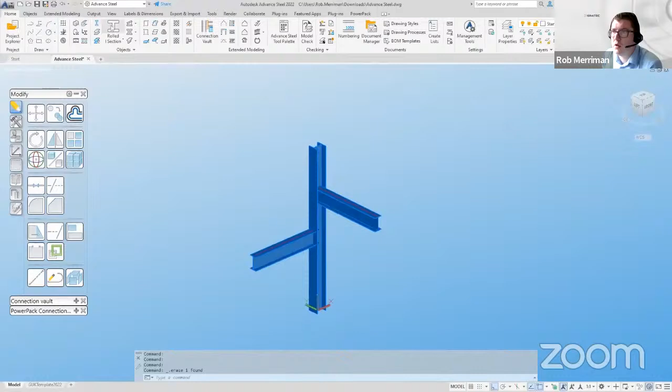What we have here is, because Advance Steel is a 3D platform, if I want to model a 3D beam, I literally click the beam command, choose my start point, choose my end point, like you would draw a line in AutoCAD at the moment. We then can choose from basically any standard section from around the world - they're all preloaded into Advance Steel, you don't need to load anything.

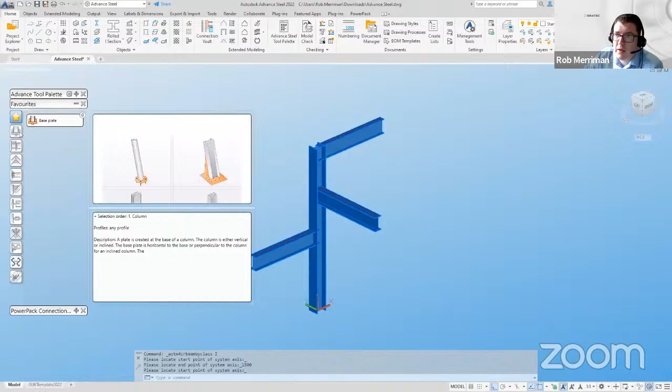And here we have our connection vault, so this is where we've got our 200 connections. You simply choose the connection, choose the member that you want to apply it to, and then within a few seconds the system will create the base plate, the anchors to go into the concrete, and it actually welds it all together for me as well.

Everything to do with Advance Steel, we work through this dialog box in here. So if I want to change the anchors, the spacings of the anchors, we can literally work through this. We can change the weld information - do we need extra stiffeners? That sort of thing.

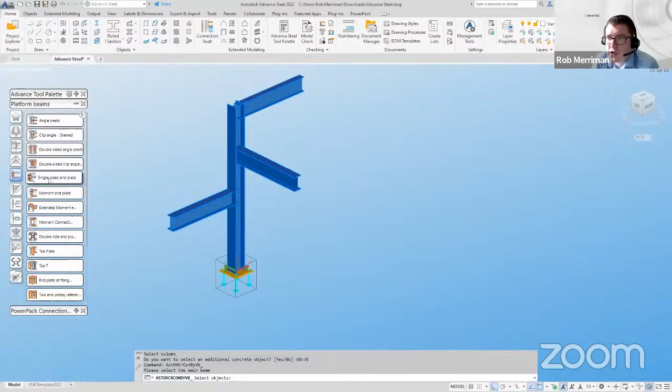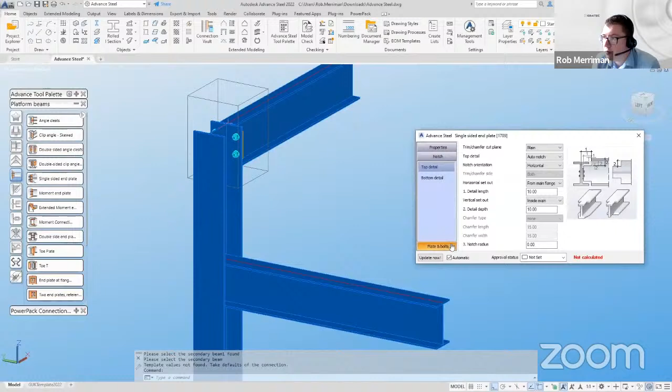So if we look at some actual beam to beam connections here, we're going to put a single-sided end plate on, choose one beam, choose the beam that's connected into it, and again the system will take care of everything for you. That is putting the bolts in, putting the holes in the beam, putting the holes in the plate, welding everything together - it's taking care of basically everything for you. It's just a case of working through the dialogue to match what your connection engineer requires.

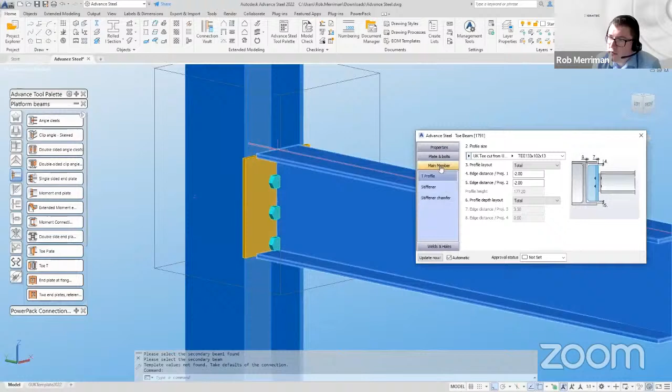Just as a real high level overview to begin with, we're just going to put a few different connections on these bits in here. So what we're putting on here is a toe plate connection. You can see the bolts aren't exactly positioned correctly, so what we do is we just increase the center distance to something a bit more reasonable, like 70 millimeters. And then we can change how the bolts are set out vertically.

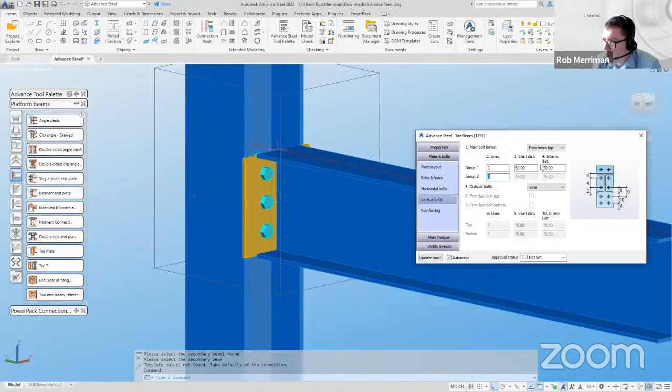And then finally, another standard or industry standard connection would be a fin plate connection. So again, what we can do in here is we can go through, change our bolt centers, and then put the fin plate in the middle of that beam.

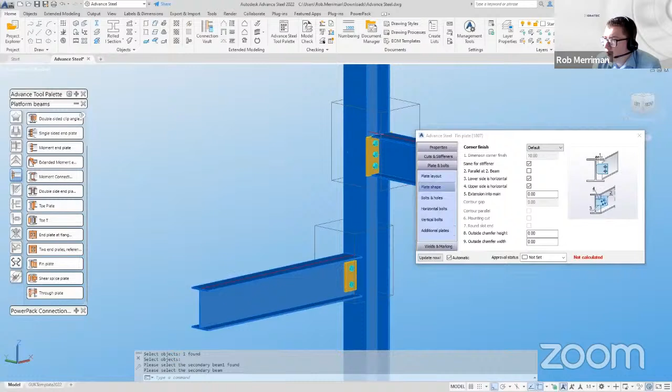Now, what we can do with Advance Steel as well, because we're in a 3D environment, I can clash check the steelwork, so the system will tell me if something is clashing. You can see in there I've got some stiffeners that the joint put on, and those are currently clashing with the bolts, so the system will tell me that.

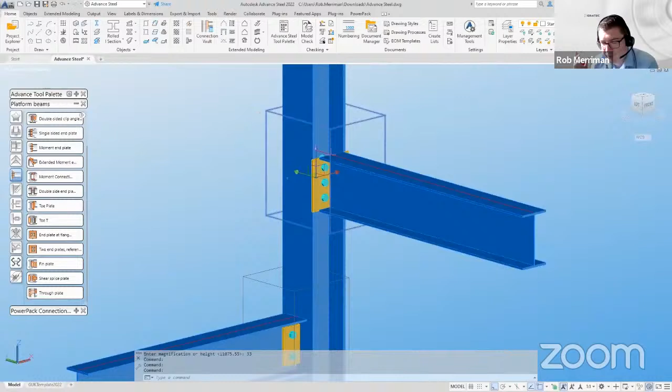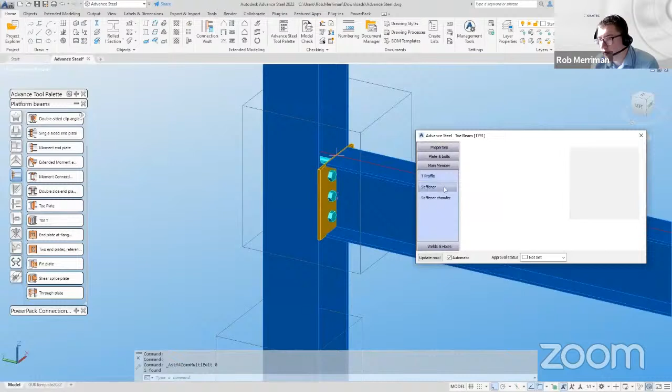And that gives me the benefit of picking up any errors with our steelwork or our structural timber before we get to site, because obviously, as I'm sure those of you who have to deliver steelwork or have steelwork projects on site, if there is a problem, it's quite time consuming and quite expensive to rectify problems on site. At the moment, this is just a 3D model, so it will take seconds for me to correct the error.

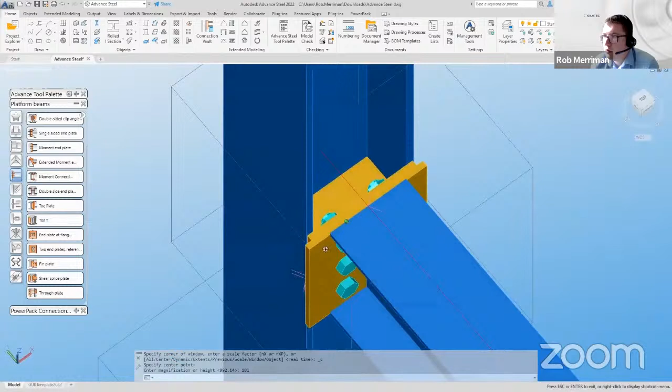Now, what I didn't realize in here is that on the column it's made from a beam cutting, so I had to change it to a plate, and I've still got an issue in there because I didn't turn all the stiffeners off properly. So it's just a case of going back into the dialog and saying, okay, we want to turn the stiffeners off.

And when I clash check it for the final time, that will tell me that there are no errors in that model now.

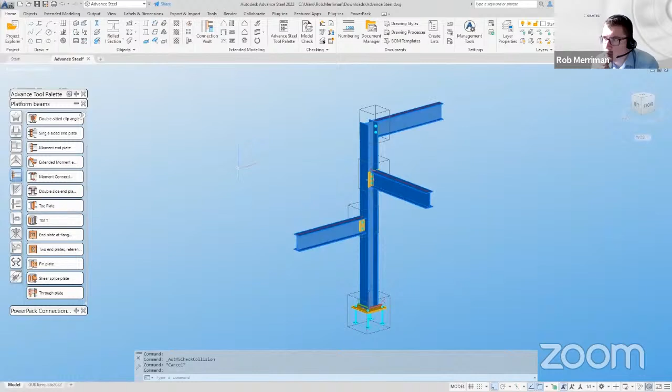Now, I'm showing you advanced steel, but if you have an AEC collection, you're possibly doing this kind of work inside Revit. Revit doesn't have all 200 connections, but we could have modeled that in Revit.

What we can do with advanced steel then is once our modeling is complete, we can actually produce piece part drawings and assembly drawings in minutes for the whole project.

And for the fabrication, we can then generate CNC data for the members and plates automatically with a click of a button. So let's go back in and have a look at what we can do for the output from advanced steel. Then in a minute, we'll move on to some timber specific things.

Once we have run the numbering on our model, the system will determine what's the same and what's different. We then have a palette on the left-hand side where I can choose what I want to run and how I want to run it. So I click the all plates button. The system will find the plates and put those onto drawing sheets for me. And for my assemblies, I've clicked the all assemblies button.

Now, there are 4 assemblies in here. It will take 2 to 3 seconds per drawing. And then we're going to go and have a look at what the system will do when those drawings have run.

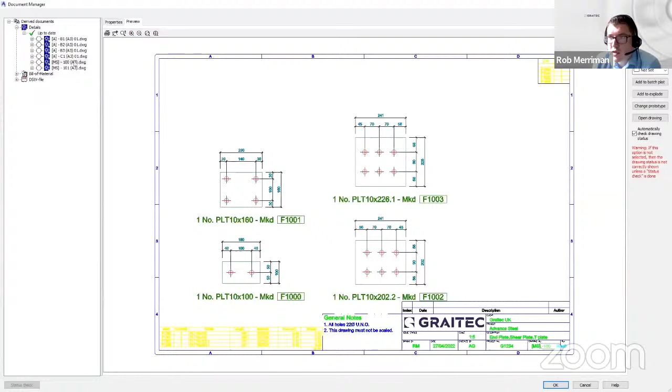So with advanced steel, what we have is what we call a document manager. The system here is telling me these are all the piece part drawings. So if we have a look at the plate drawings, that is what it takes 2 or 3 seconds to produce. It gives you the horizontal and vertical dimensions. So those are our piece part marks.

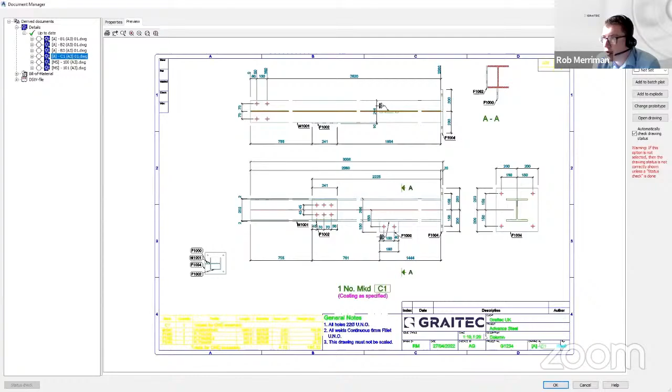And then for our assemblies, the system will show you what's welded together, how it's welded together, what parts you need. So it's round tripping all of the piece part information. You can see that column's got a toe plate, a fin plate. It's giving all the welding information.

Now to run our CNC data, I select the plates in the model. I push the button for a DXF file, and that will create those files for me. The system produces those files so that a plasma machine or a laser machine can actually go and cut out all of those plates ready for the fabricator.

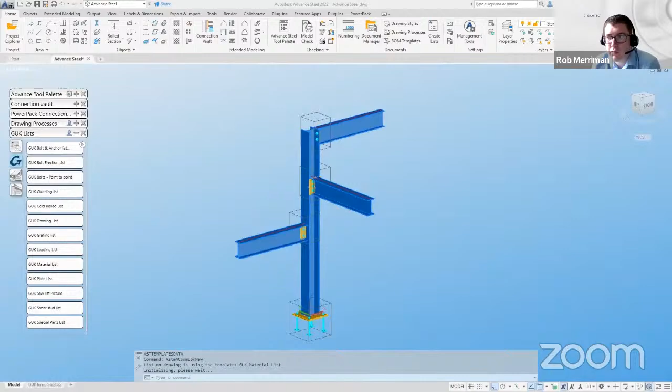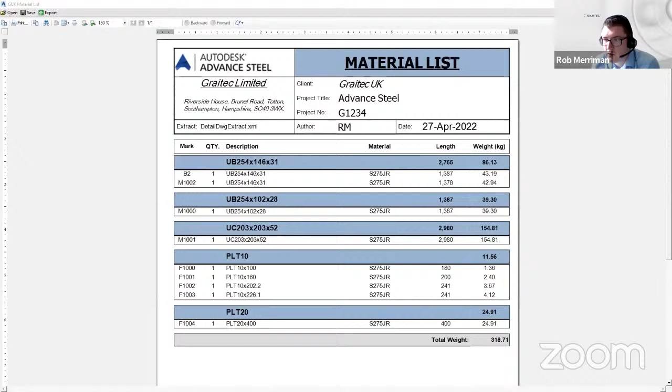And then the fabricator actually needs to order that material. So rather than us measuring things and creating a list in Excel manually, because everything has been 3D modeled, we can extract all of that data into a material list, for example. This will tell me how much 254, 146, 31 I need, what it's broken down into, what plates I need, and that kind of thing.

So that is a very high level overview of advanced steel. I know for Andrew and the Structural Timber Association, we are looking at advanced steel for timber. So why advanced steel for timber?

For me, structural timber models are simply beams and columns. And in advanced steel, it doesn't matter whether that is an I-beam or a structural glulam beam. So that sort of project in there, that's something I've created in advanced steel in the past. That is a mix of steel and timber.

There are already timber sections defined in advanced steel. So we've got timber purlins, we've got stock square timbers, we've got glulam sizes. And with advanced steel, if there isn't something in there, we can actually add it in ourselves.

We do already have a number of the STA members using Advance Steel, and structural timber companies using Advance Steel. So a few examples are Stuart Milne - we've done a training package with all the offices of Stuart Milne. Fordingbridge, they use it for their canopies and things like that. And then we've got companies such as Byram Associates, Harmony Timber, Fleming Homes, Frame Homes, Castle Oak, Sipco, who are predominantly a timber business, but the majority of their projects will have some structural steel work buried in there.

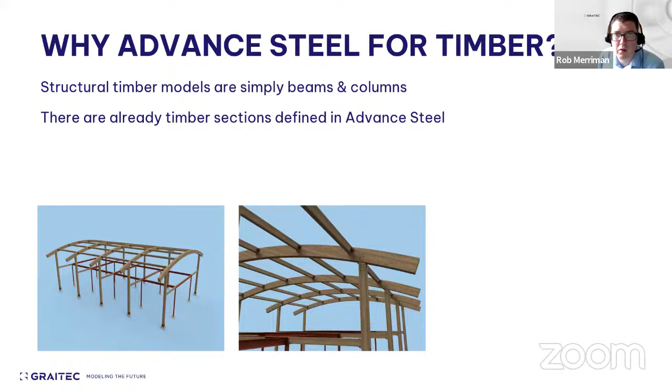So although these companies are 90% timber, there is some steelwork in their projects, and we found that's what is producing their bottlenecks and slowing them down. So these are companies that have already introduced Advance Steel to their workflow.

Structural timber or steel to timber connections are joined with steel plates, bolts, anchors, and welds. For example, here we've got a glulam column with a steel foot on it. You'll need to produce fabrication drawings, CNC data, for the steelwork or the glulam, which is what we just looked at with Advance Steel.

Rob, I've seen a question come up in the Zoom chat: is the system objectified, where you can alter any piece of information and adjust the details or spec and vice versa? Yes. When we put connections on in Advance Steel, we put them between the two members. So if a member has to move 300 millimeters, that connection moves with it, all the plates, bolts, and welds moving automatically.

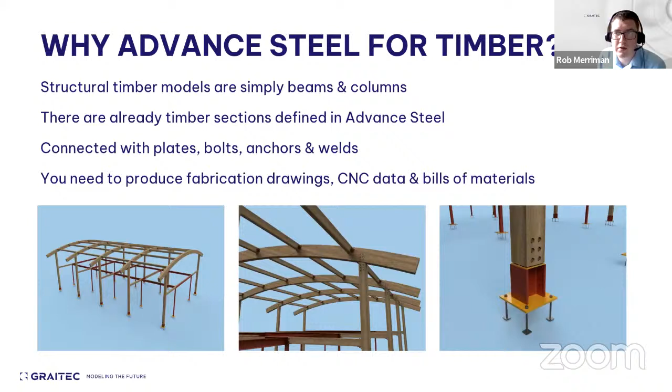If your connection engineer comes back and says the bolts need to change from 3 M16 to 3 M20 and the plate needs to be bigger, we just go into that dialogue like before, change the values, and the system updates itself. If we then make updates to the model, the document manager recognizes the changes and warns us that the drawings are now out of date, allowing us to update them as needed.

Advance Steel is a steel detailing program, so out of those 200 connections, there currently aren't any for timber to timber or timber to steel. But what we can do is create what we call custom connections.

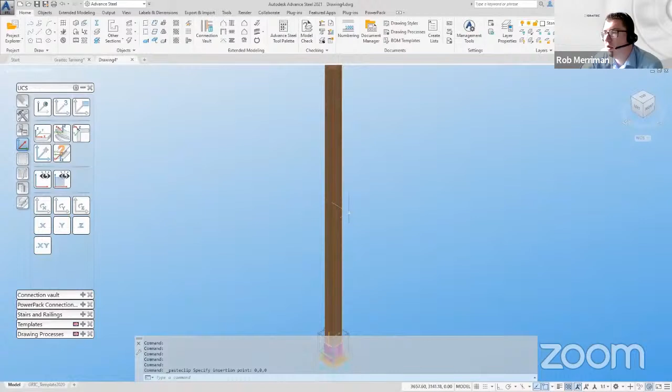I'm not going to show you the building of each individual piece, since we're only here for a set amount of time - I could probably do 3 or 4 hours on this, but it's a Friday. So I've already created the connection we just looked at, just by doing everything we've talked about and modeling some bits manually.

What I'm going to do now is clash check it, then create what we call a custom connection. I'm also going to check what's attached in the workshop, so we can see that fin plate is attached there. There's some setup I need to do here.

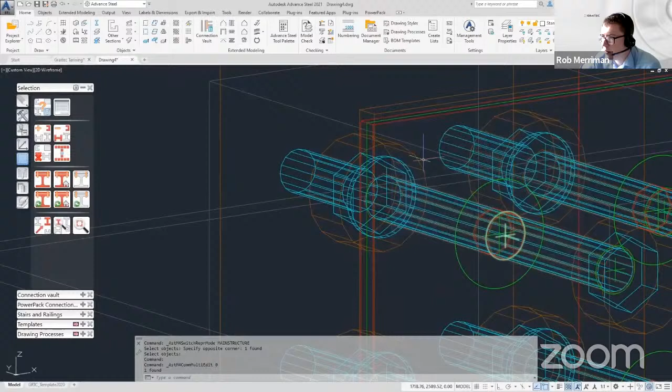That connection doesn't exist in the system, but with Advance Steel we have what we call a custom connection. I can build everything, then say I want to apply this and give it a name. This is a 240 glulam column that I have.

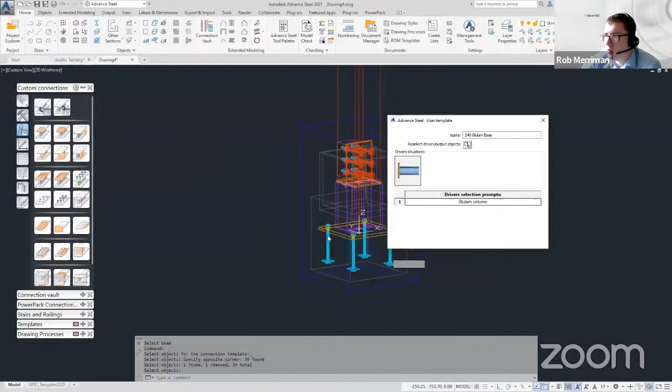We're going to choose my input, which is going to be the glulam column, and then choose what I want the system to apply - all of that information automatically to my glulam column. It's something I don't want to model across multiple projects.

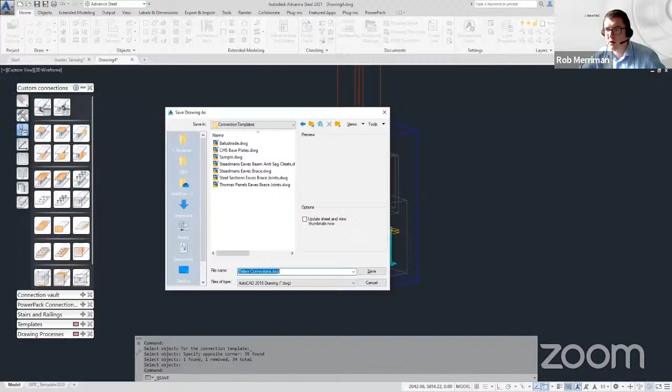Now we do need to save this in a particular folder so the system recognizes it as what we call a custom connection. So the file I'm going to call this DWG file custom connections, and I can close that down.

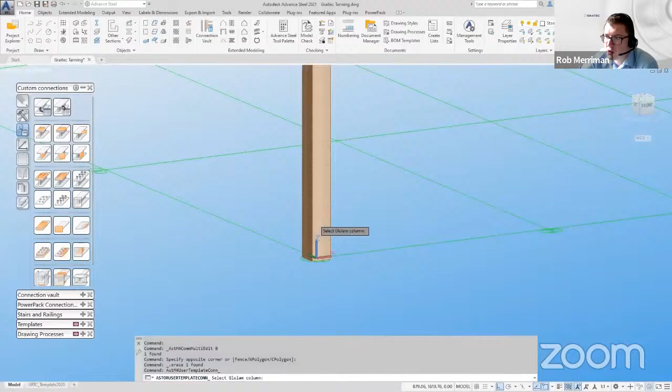Now if I delete that from my file and reset the glulam column so it has no cuts or shortenings, just modeled as a glulam column, I can say I want to insert a custom connection. We can see the folder there, custom connections - choose the glulam connection, click on the column, and hey presto, the system applies all that information automatically.

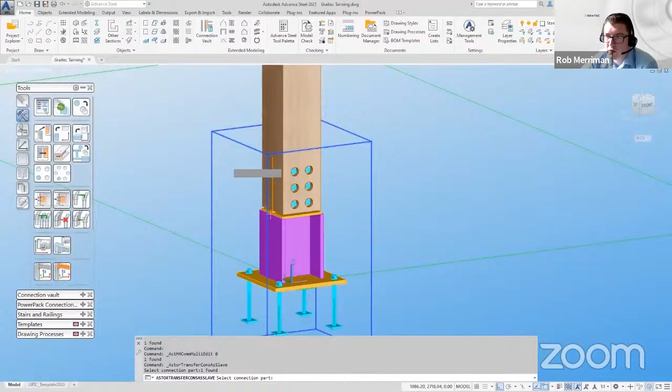So it means I can model it once and then use it across multiple projects. I can then start to copy these joints from place to place. If I'm happy with that, I can say I want to copy that joint to this glulam column here.

Now this was bad modeling on my part - I'd actually modeled that glulam column incorrectly, although it's a square column it does have an XY position. So here I've just rotated it, and you can see as soon as I rotate it, the connection rotates as well.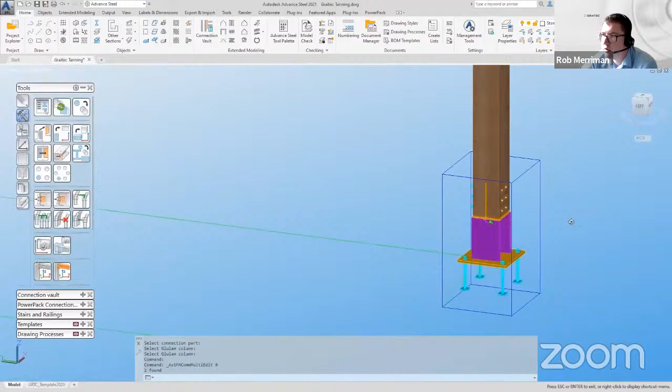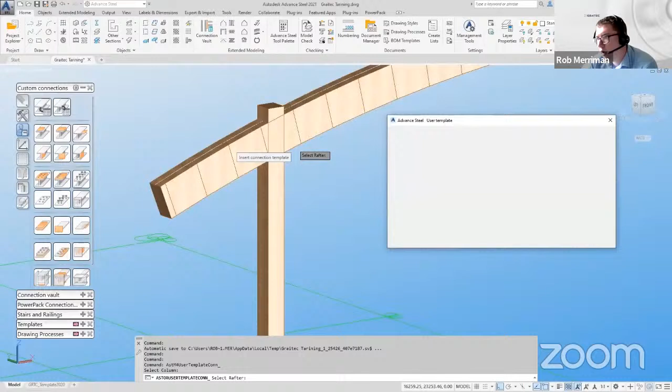And then I think we're going to jump to a column to rafter with an internal fin plate. So again, if you look, it says choose the column, choose the rafter. It will then cut the column down to the rafter. It puts the steel plate in. It puts the 12 bolts in, and the way that I've set this connection up, it will then counterbore those connections.

Now, one thing that some of those companies I listed find is that if you're putting timber into a steel building, we then need to pack the webs and the flanges of that steelwork so that we can put joist hangers off it and things like that. So it is possible to create timber packed steel in Advanced Steel.

Now that timber packing, we can actually model it as a plate element where we can just draw in a rectangle and then give it a thickness. So it allows us to create packing of different thicknesses if we need it, or we can then create that packing from stock sizes.

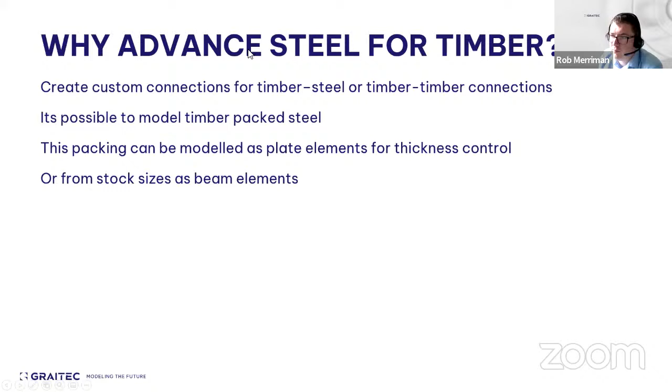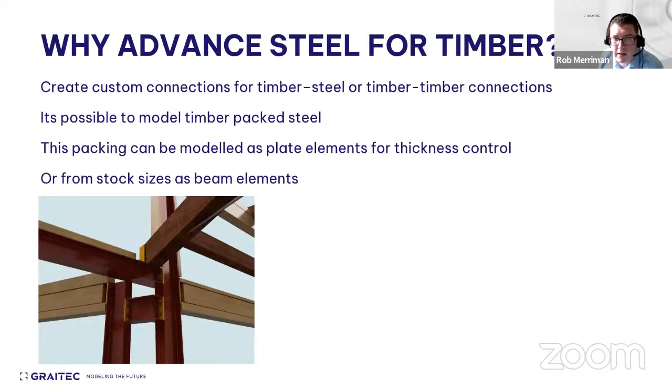So that's an example of some steelwork that has got some bolted connections in there like we've just been looking at. There are a couple of glulam beams in there, but some of the timber has been flange packed and web packed, and that's all done again within the Advanced Steel environment.

And then if we look at some of the customization that we've done for some people for their timber workflows, it is possible for us to customize the drawing output, because for some of these companies, the steelwork goes off to a separate subcontract fabricator. They do the welding of all the steel components. It then comes back to the timber company, and that timber company is the one that will do the packing of the web and the flanges. So they need two drawings.

So what we can do in Advanced Steel is we've customized it. So this drawing in here says it's the steel fabrication for one number beam that's marked B1. And in the bottom of our drawing border, it says that it's STL for steel, it's an assembly, and the assembly number is B1.

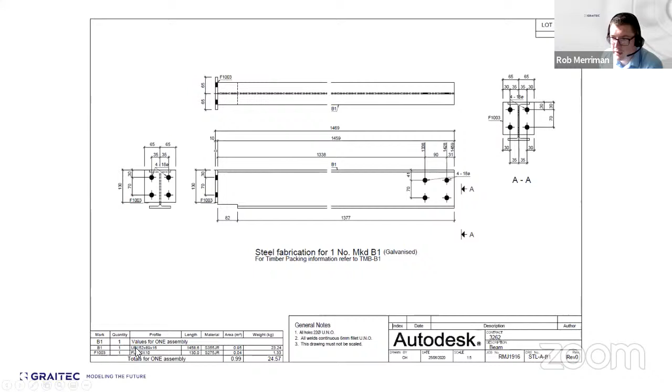So this is our automatic drawing that gives the steel fabricator the information to weld plate F1003 to mark B1. These are the holes that they need to check, and then this is the location of the plate. And then you'll see a bill of materials down here in the lower left corner that says you need this beam and this plate. So that's the steel fabrication part done.

We can then create a second copy of that drawing, but this one is called TMB for timber. And what you'll see is that it doesn't give any of the information for the steelwork, but it's noting and dimensioning where the bottom flange pack is going, where the top flange pack is going. And you can see in the bottom left, our bill of materials, it's telling me what timber packing we need for that particular beam.

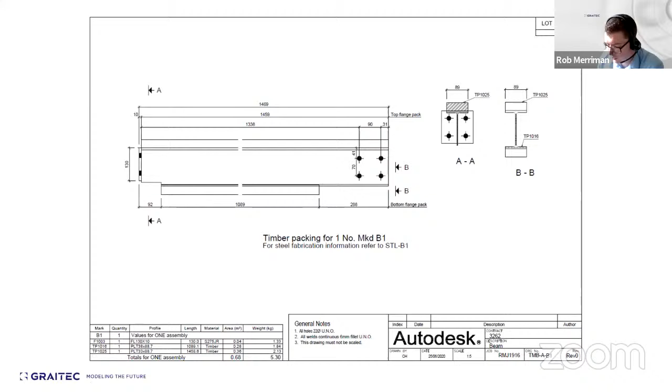So this is some of the customization that we at Graitec have done for some of the companies that I mentioned earlier on. So it is possible to produce this kind of output from Advanced Steel.

For timber CNC, we can export NC files. So NC stands for numerical control. Now, NC files are usually used for a steelwork drill and saw line. So if anyone does have any particular machinery that needs particular formats, please reach out to me or ask it in the Q&A when we get to the end of this presentation.

As I said, Graitec don't own Advanced Steel anymore, but in the introduction to Graitec, it mentioned that we create our power packs. So the Graitec power pack is Graitec's add-in for Advanced Steel. We've created a command where it's possible to export parts to a STEP file, IGES, SAT, or a DWG format. So we can pick the 3D elements from the model, our glulam beams and columns, and then create a SAT file, which I know one of our customers uses for their glulam. So that is our power pack ribbon, and we have this export parts to solids in here.

So, because I know I'm limited on time, like I said, I could bore you for 4 hours on Advanced Steel, but this is just a high level overview.

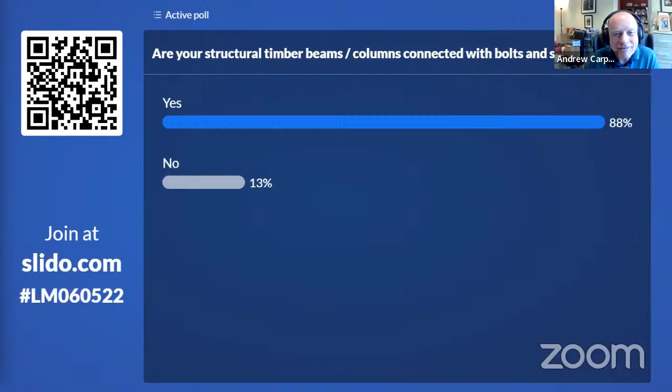Yeah, and it is. And that is how I started my career 13 years ago, creating the steelwork in 2D AutoCAD. So you're manually drawing plans and elevations. And because you're doing it manually, it does open it up to errors. And like I said, I've been there. I spent 18 months doing it to learn steel detailing in 2D, like my boss would have learned on a drawing board.